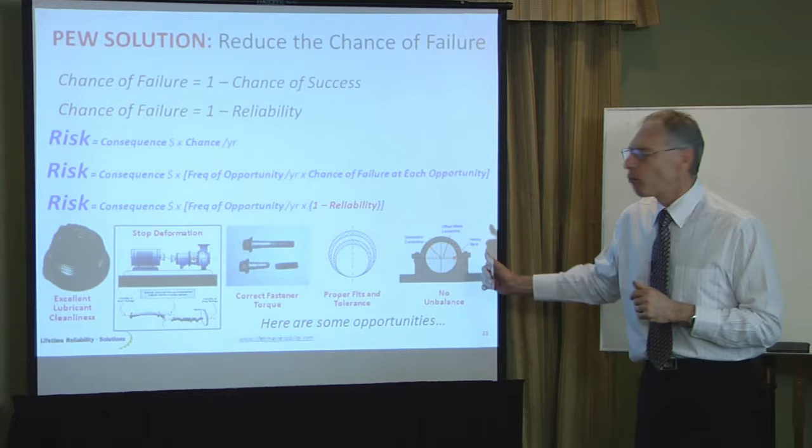Okay, so what are the sort of things that are opportunities for lack of reliability? Poor balance, wrong fits and tolerances, wrong tension in fasteners, shafts that aren't aligned or shafts that are loaded up and stressed, rubbish in our lubrication. These are all opportunities for things to go wrong. It doesn't mean because they are there it will go wrong. It just means where they are there, there's a chance it'll happen.

If there were no problems with fastening, if my shafts were correctly in line, if there was no contamination, then the opportunities would not be there. The chance of failure, much, much less. So if I can manage contamination and prevent it, manage alignment and ensure it's correct, get the right fastening, get the correct fits and tolerances, get the correct balance, I will cause reliability. I will decrease the chance of failure.

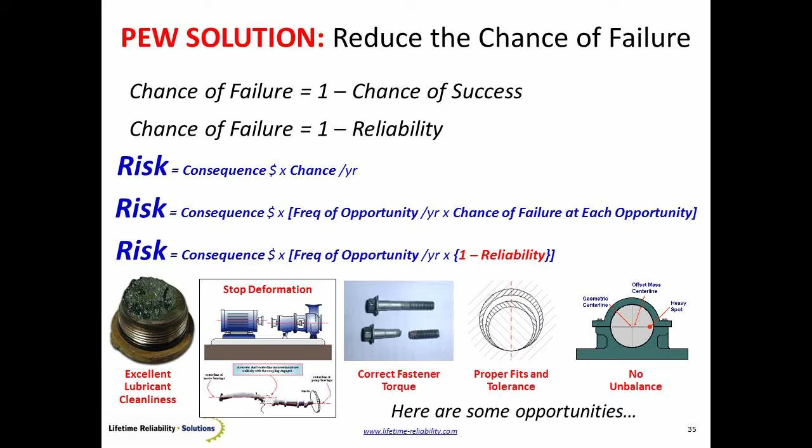So now we have our risk equation. Risk is typically consequence times chance, is what most people see in the books. This is a situation that Einstein warned us about. One of his advices was to make things as simple as possible, but no simpler. And I think the mistake we've made with risk is we've made it so simple we've actually missed the real meaning of what risk is, because this equation here has dropped off one factor in risk.

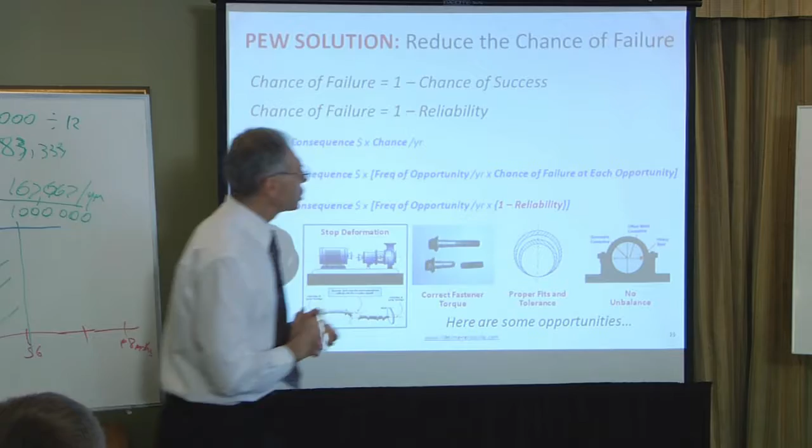The full equation of risk is consequence times the frequency of opportunity times the chance of failure at each opportunity. What this equation has done is dropped off this opportunity word. It doesn't show us there are actually three factors that affect risk. And this chance of failure is actually 1 minus reliability. There it is, chance of failure, 1 minus reliability. So I have now tied reliability back to risk.

High reliability and this risk of failure is reduced. If my risk of failure is high, my reliability is going to be low. So if I can manage opportunity and prevent that by everything being right, then as a consequence, opportunity gets smaller and smaller. If I can ensure reliability by making the right choices, by installing things correctly, by running things correctly, then these two factors can work together and the risk of failure drops lower and lower and lower.

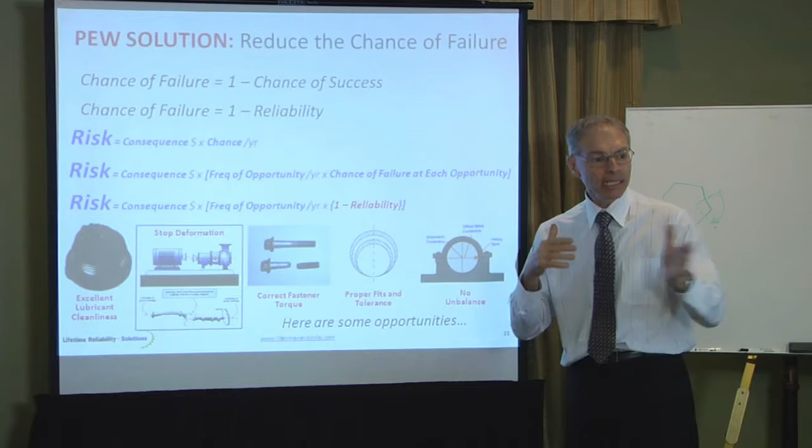And that risk of failure falling means my uptime increases, my throughput increases, my costs are reduced, all the things we want to see happen. So yeah, that's why I'm confident. It's not going to be impossible to get these outcomes because all of these are controllable. Once I set the standards that deliver high reliability and meet those standards every single time, then I will produce those results.